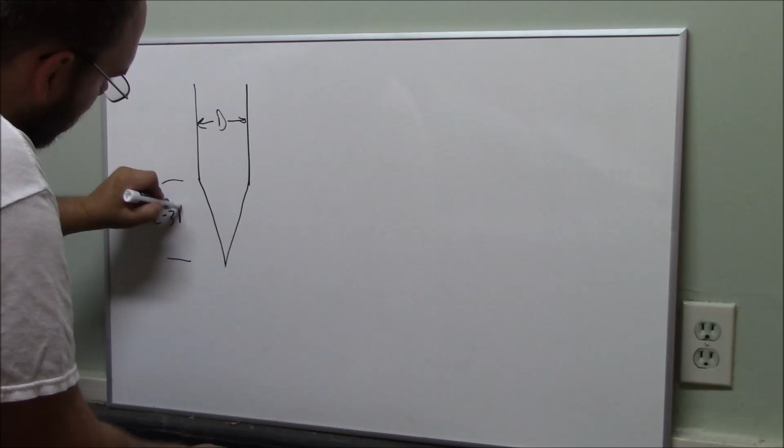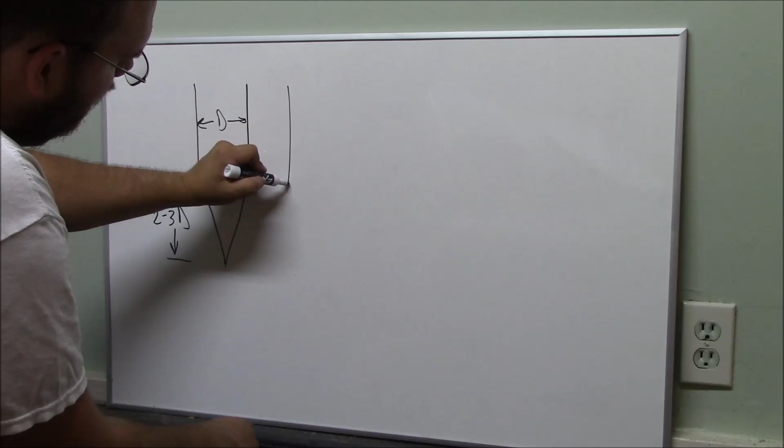So the idea, it's going to be a big picture just for showing, is that with your tungsten's diameter or thickness, you're going to want your taper to be about 2 to 3 times your diameter. And that's just to give you the correct taper. So then, over here, we're going to draw the next one and hopefully draw it a little more straight.

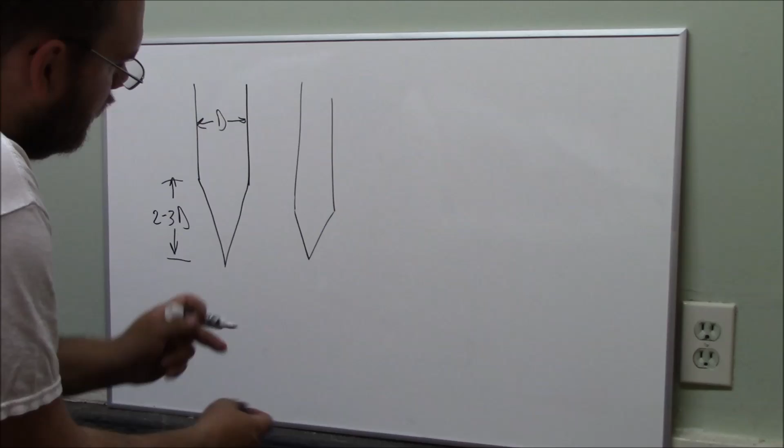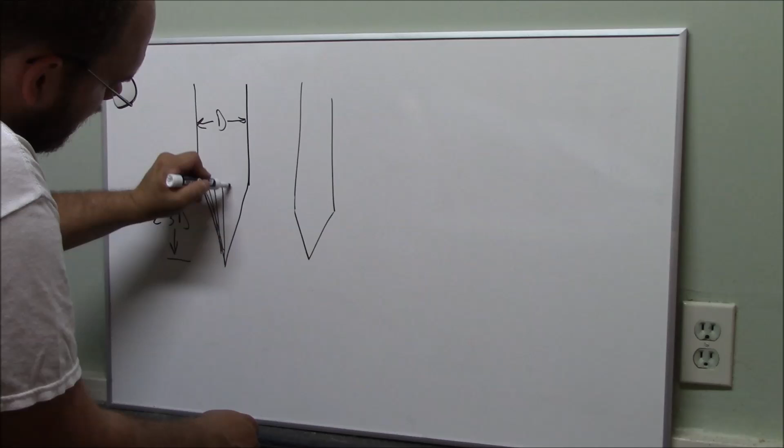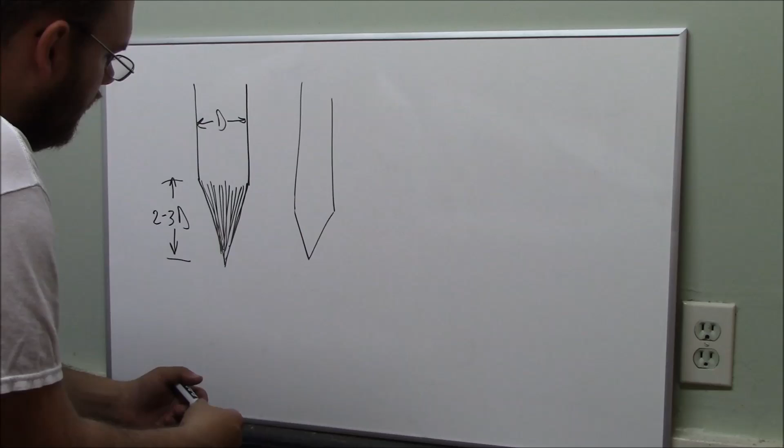The two different techniques: the first one that I show is making sure that it's ground so that all your grind lines are in line with the tungsten. They're vertical with the tungsten. And then a lot of times you'll get some people that say you gotta grind it so that your lines are like this.

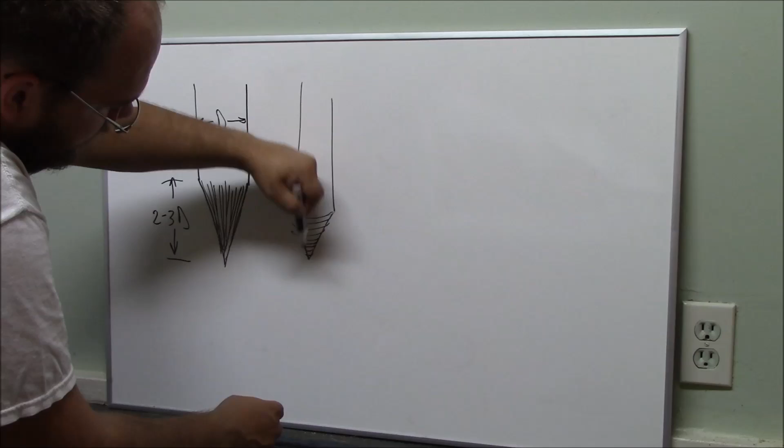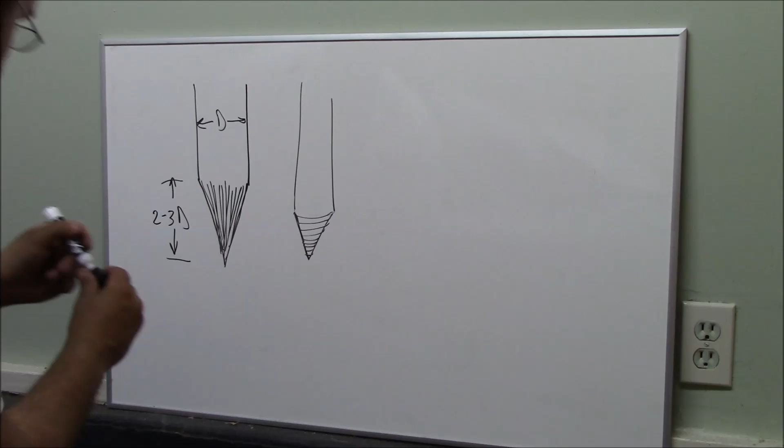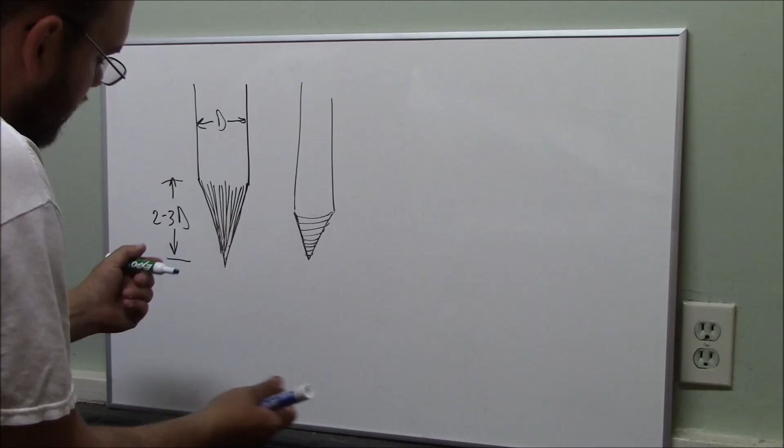Well, the theory here is that if you go back to electricity, it likes to take the shortest path, or path of least resistance. So, just for the sake of it, a different color marker. You've got your base metal here, then you're trying to initiate an arc.

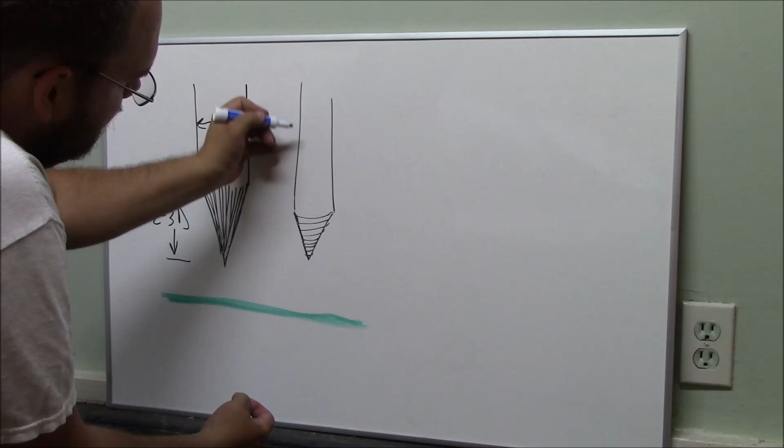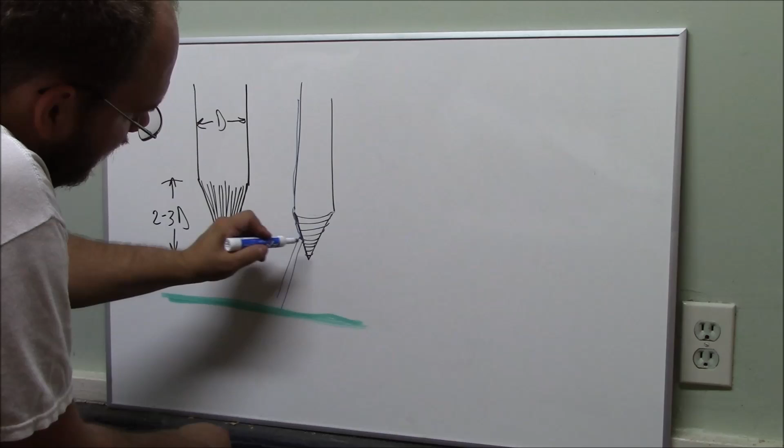So what happens when you have grind lines like this is the electricity will run not necessarily through all of the tungsten, but on like a skin along the outside of the tungsten. So the electricity is just running down, down, down. And when it hits one of these grind lines, let's say this grind line's got a little bit deeper profile, now it's going to try and start to arc out from there because it hit resistance. So you got your arc right here, and it might actually literally dance around that line instead of on the tip.

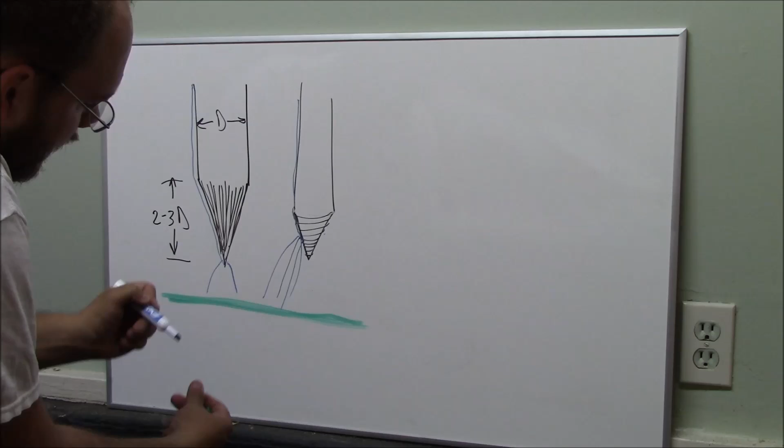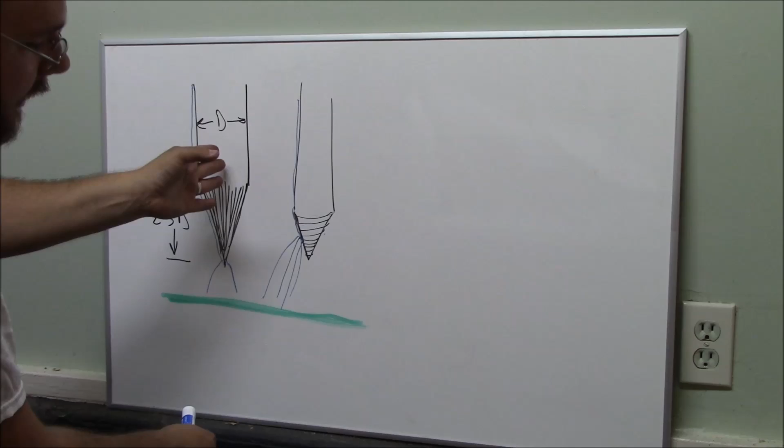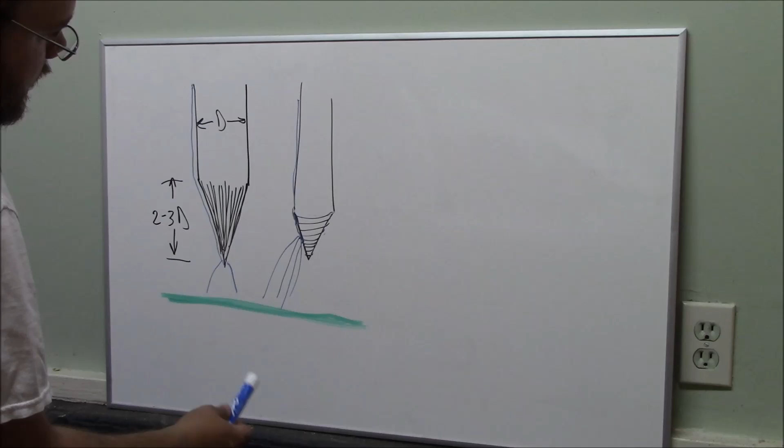So when you have all your grind lines like this, there's no resistance, it just keeps following the line until it gets to the tip, and then you've got the arc that you want. So that's why you grind your tungsten so that your grind marks are vertical or in line with your diameter, versus crosswise to your diameter, because of the way the electricity flows through it. This offers the path of least resistance, and you'll have a more stable arc that doesn't tend to wander on you so much. And nobody likes a wandering arc.

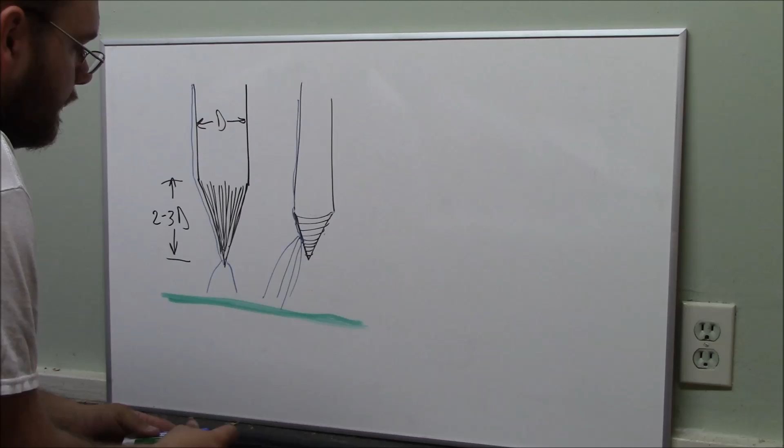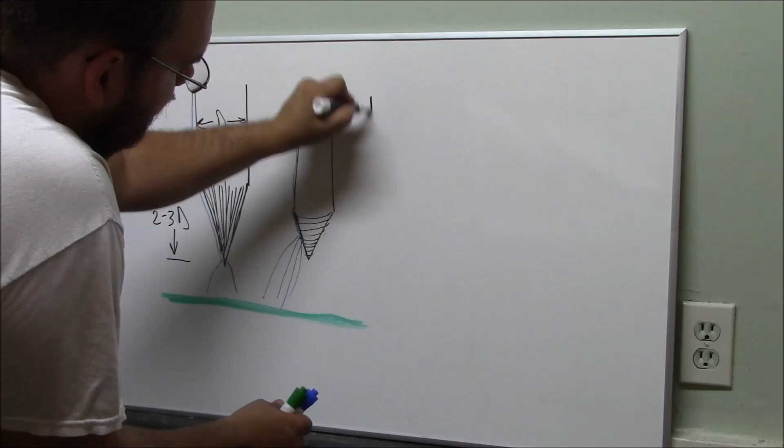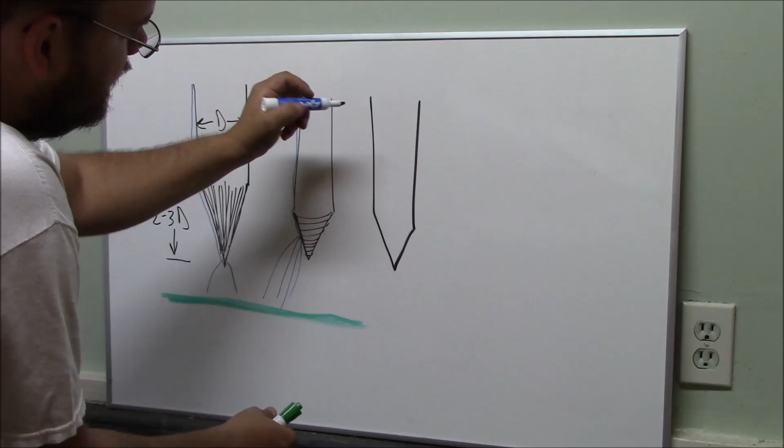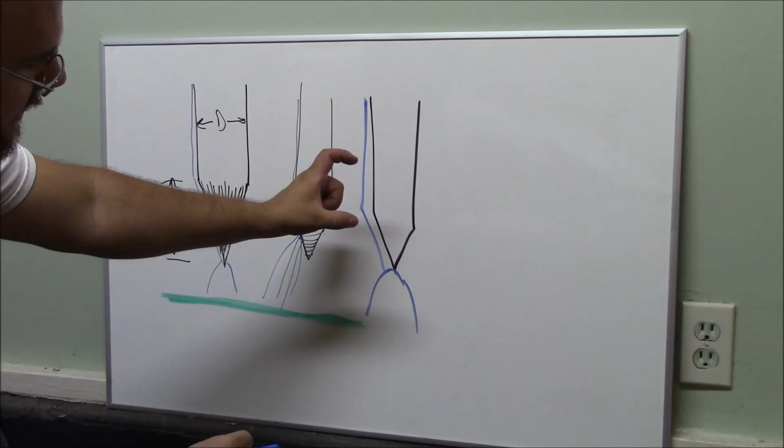So then there's also the third option, which is you just buy it diamond ground, and it's practically just like that. There are no grind lines. There's my arc. So the feasibility of this option is that, yes, it's great. I think you can buy them in 2-inch lengths, or maybe 1.5 inches. They grind each side, so you can just take it out and flip it over.

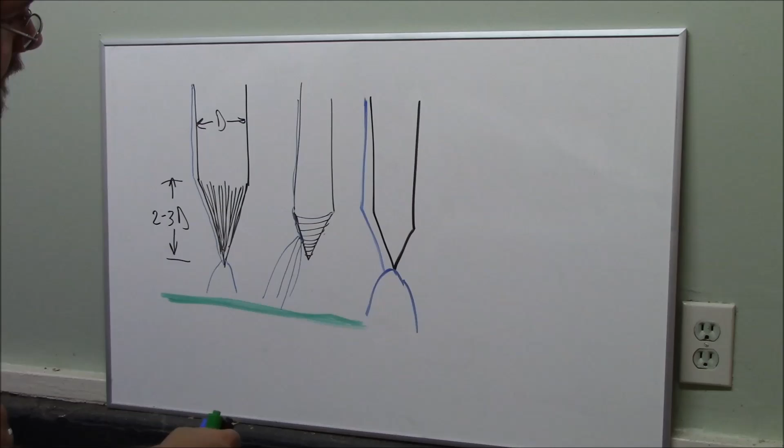But in reality, when you have to pay for the tungsten, that's quite wasteful. Every time you have to dress up your tungsten like this, you might take up maybe 1/4 inch of the tungsten at most, unless you really goobered it up. So the way I see it, this is the most economical route. I just use an 8-inch bench grinder. I don't have a $1,000 Piranha or something like that to do it with, although if you had one of those, this is the way it would grind it for you. So if you go with the diamond ground ways, you're practically throwing out 1 inch of tungsten that you could have otherwise redressed 4 times using this method.

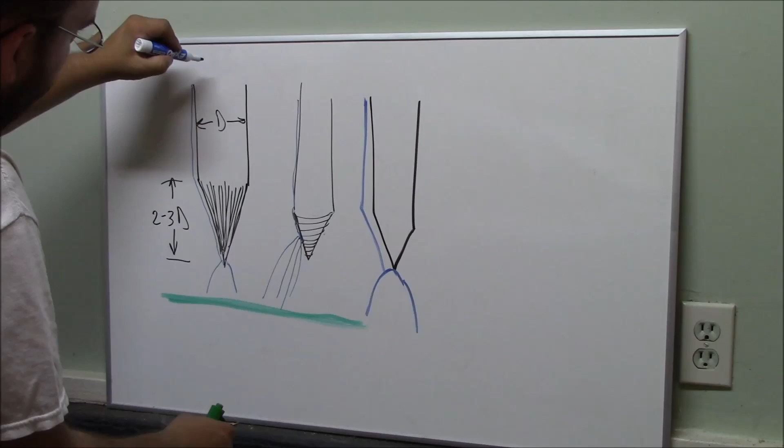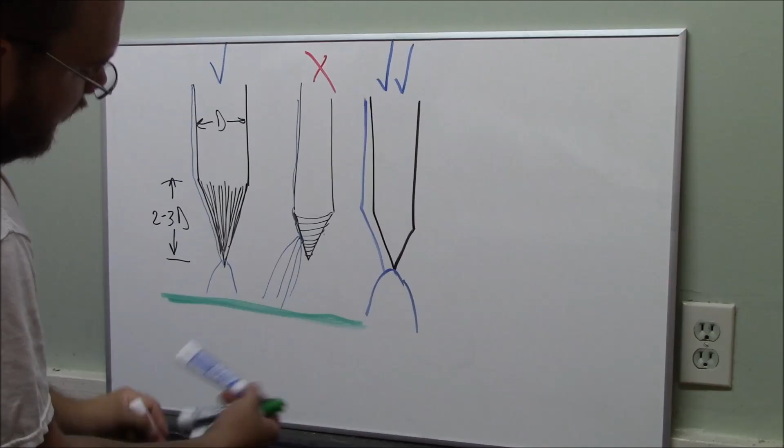So just to point it out, this is correct. This is really correct. And this one is bad. Bad. Bad.